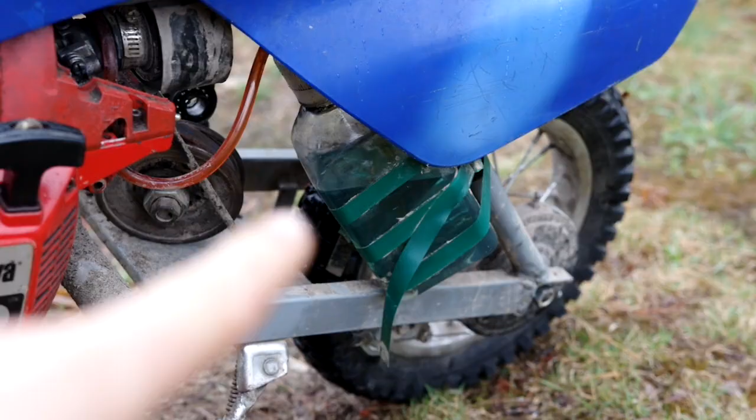This is my Shindao swapped Razor MX350. And although it might look nice, it has a plethora of problems. Like that gas tank, made of a water bottle. Or the fact that it pretty much doesn't have a drivetrain, as you can see. First thing I'm going to work on is the drivetrain, so let's get to work on that.

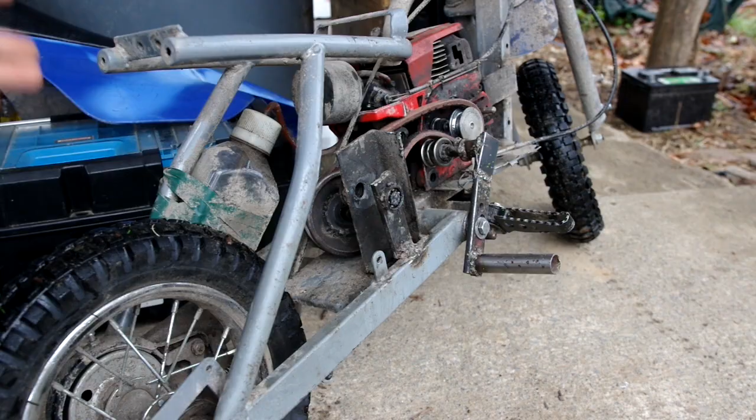Now here is the Razor, and I'm just going to kick this off by saying this was terrible. Look at these welds, look at this. I could probably snap that right now, and it's kind of bending. Well, this is already snapped, you can see. This was okay, but I could also improve this.

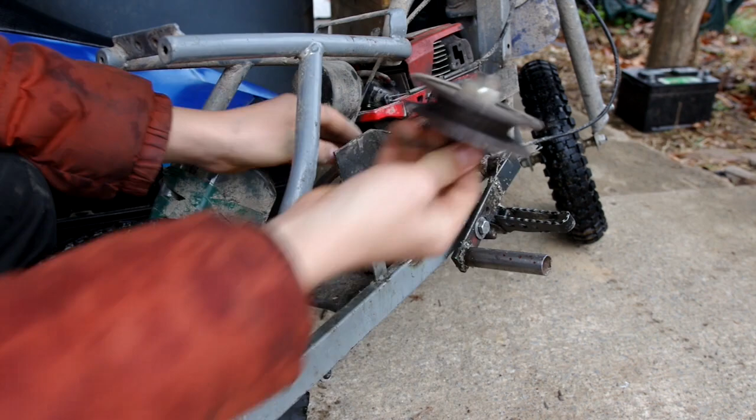And obviously it's not adjustable at all, so you've just got to find the perfect belt and then just pray it'll work. Which has led to some burning belts, as you can see, and generally some bad problems. This is also terrible. I'm gonna have to redo that too, and this pulley is terrible. So let's get started by 3D modeling some new parts here, which I can then cut out of steel.

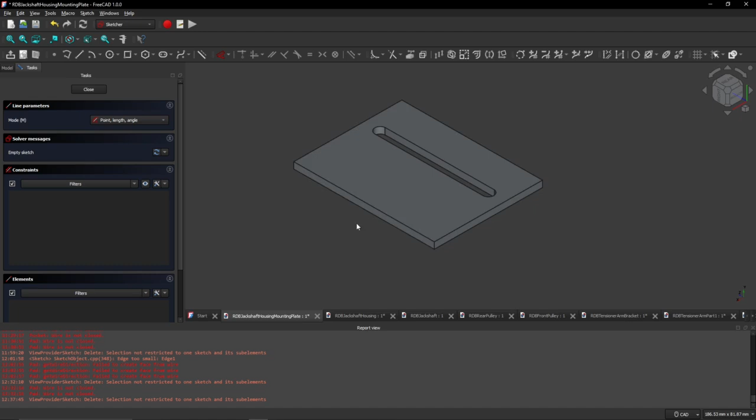And the tensioning arm that actually basically does the clutching also can be adjusted in length by 15 millimeters, and the angle of the end of that arm can also be swung around to adjust it even more. Point is, it's all adjustable. This piece is going to weld onto the frame, and this is just for reference. This is going to be cut out of a piece of plate steel.

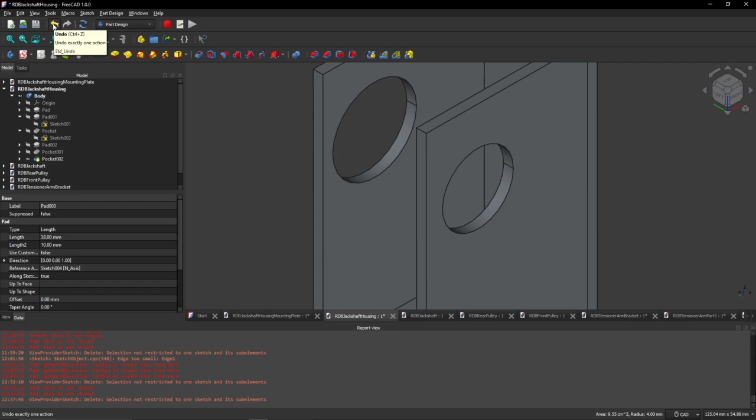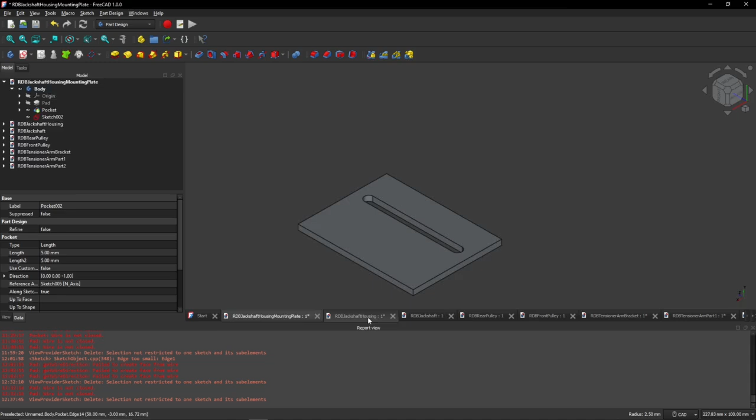These two holes will have bolts going through them, and then those bolts will go into the slot, and that'll allow the jackshaft housing to slide back and forth. The jackshaft itself here will be made out of steel and go into the two bearings between here. Here is the pulley that attaches here. Front pulley. This is mostly for mock-up. I'll just make this with crap I have lying around.

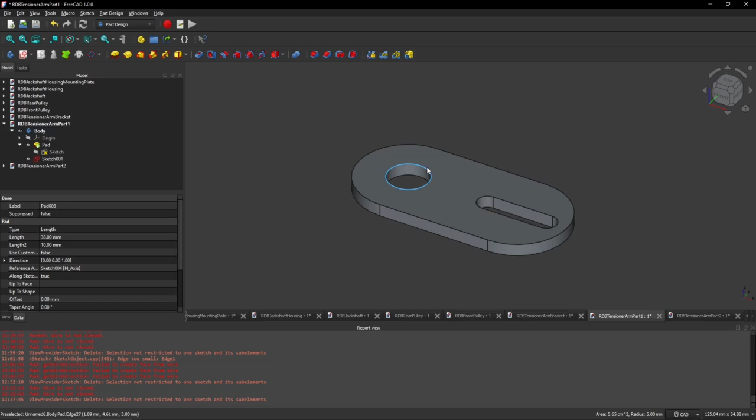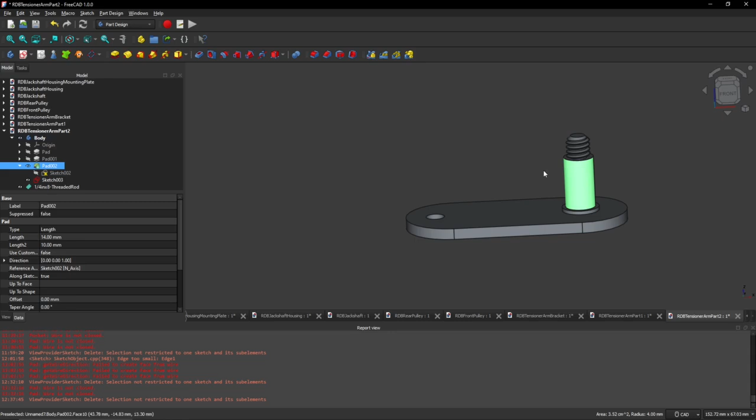This is the tensioning arm bracket, which welds to the frame. Here is the first part of the tensioning arm, and this is the pivot point right here. Two bearings will be welded on each side of this piece, and it'll go into this bracket. This slot here is for another bolt to go in through this hole here on the second part, and that'll allow the length of this to be adjusted a bit, and the angle here, so it'll tilt forward around here. And onto here, two more bearings will attach, which will be the actual tensioner bearings. They'll rub against the belt.

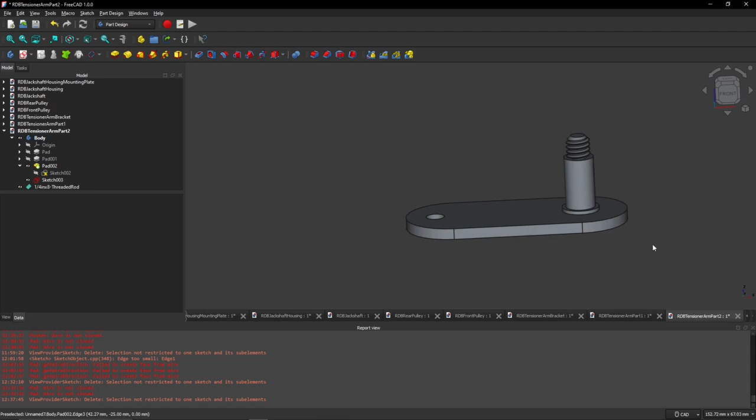Now some parts, like this housing, I can make here with materials I have here, but other parts, like the pulleys and parts of these two tensioning arm pieces, I can't make here. I'll need machines for that. Like this little piece here. I mean, this bracket itself I can make. This I also can't make here, and obviously the jackshaft itself I also can't make here. But I will get to work making some of these parts. Here I am in the basement, and I've gotten this little cheat sheet of everything that I need to make.

What part is this? J1. And here, let me confirm it's the right size. It should be roughly 75 millimeters, so 70, 80, any of those will work. Roughly. Now this gets marked as J1. And off to the pile it goes.

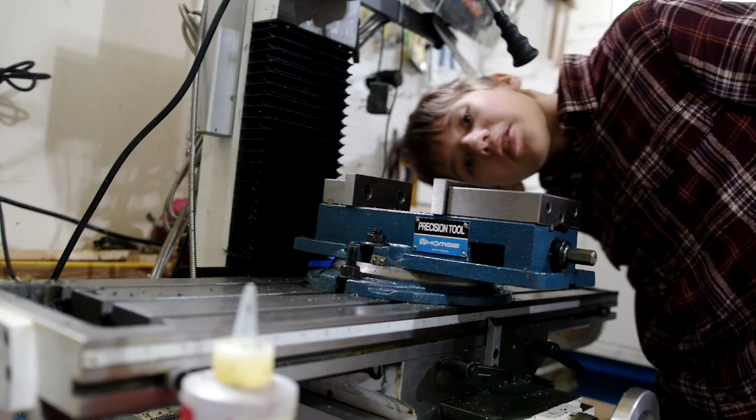There's quite a bit of steel there. So that's every single plate that I had to cut on this paper. Of course, there is still some drilling to do, and I will do that tomorrow. So I'm at the old house now. Hello, this is the mill.

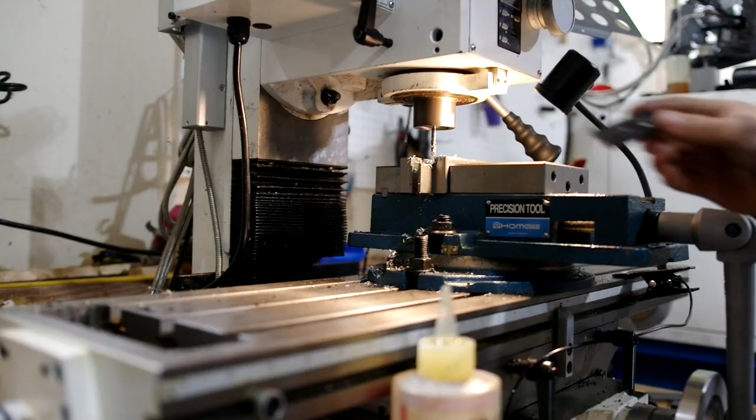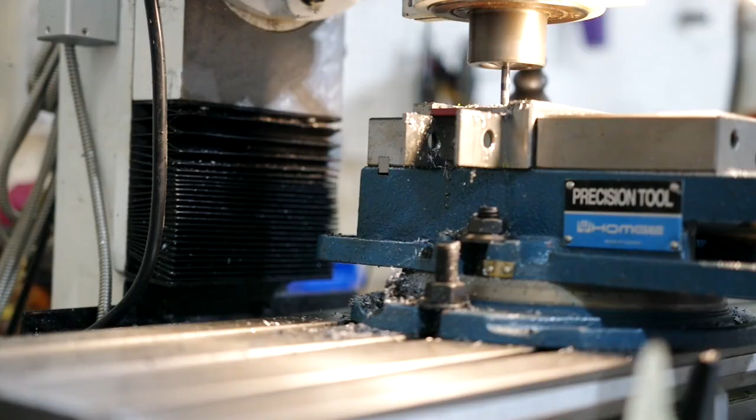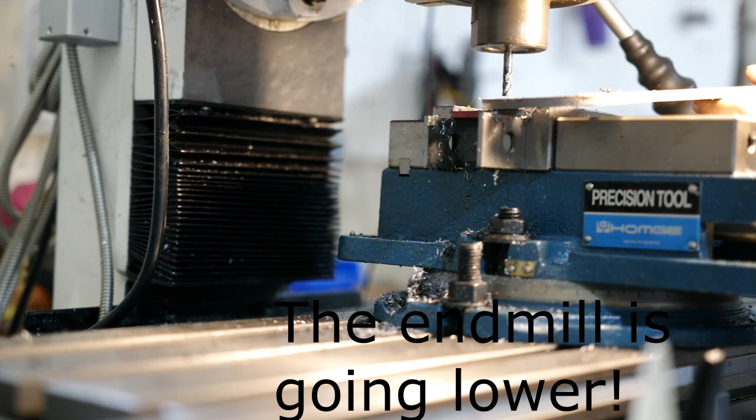There you go, here's the finished part. Now I'm going to make part of the jackshaft housing. Here I've just got to drill 2 holes. Here is the piece finished. And I believe this is the final piece where I'll have to do lots of milling. I'm gonna have to check back on the footage to see how in the hell that happened. There you go, there's the final part.

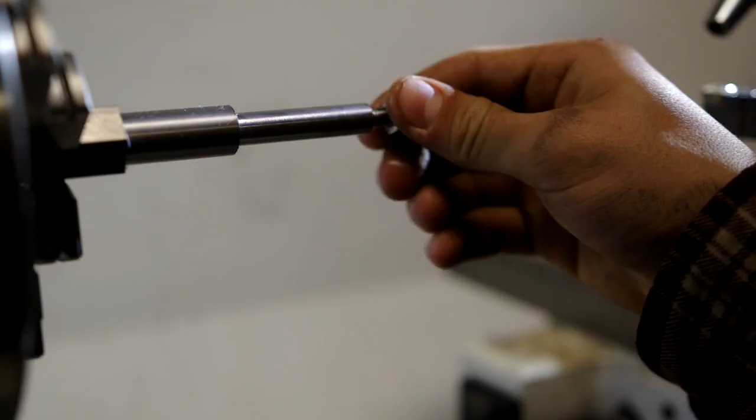Here's the finished cut here, you can see. That's all good. Yeah, perfect.

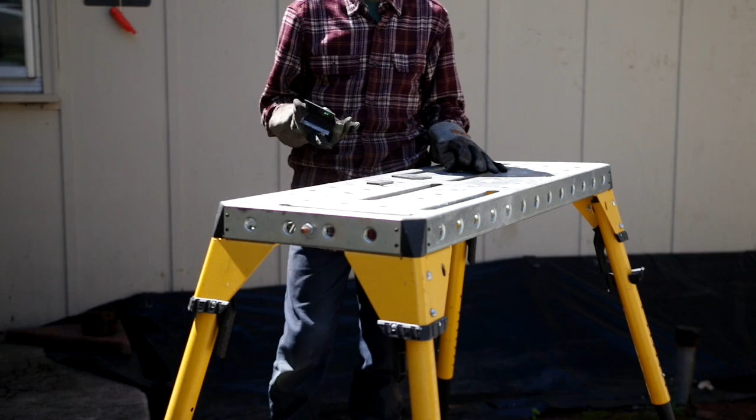I've done some last minute machining that you probably didn't see, like these holes for the bearings. I just didn't have time to film it. But let's get welding, and yes, I am welding on the welding table instead of on the ground.

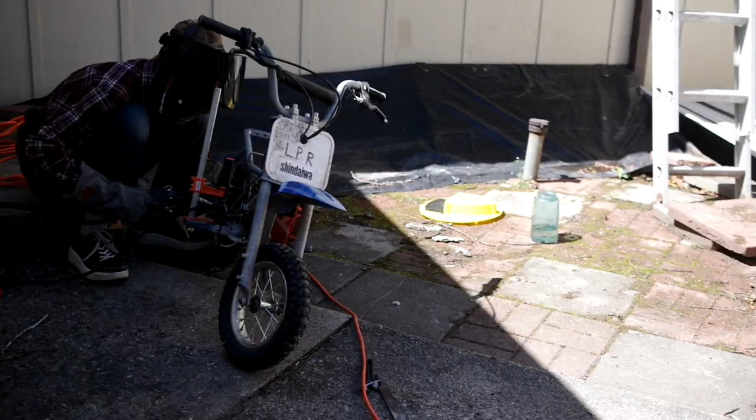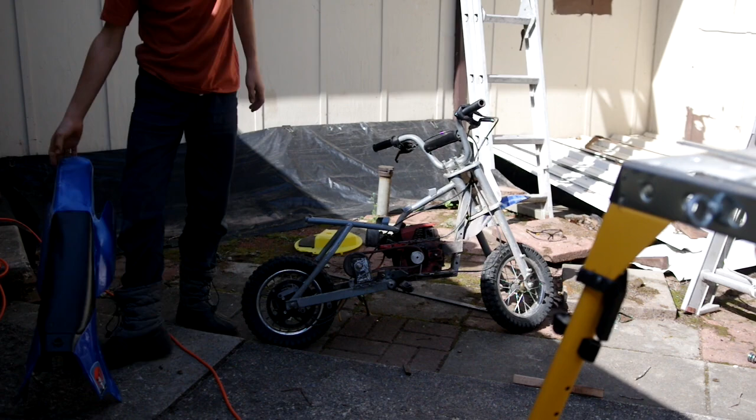The bike, and ignore me wearing boots. This is just what I can throw on really quickly. But anyway, the camera kind of stopped filming a while ago. I was too lazy to change out the SD card.

That's done now, so you can see this tensioning arm piece is assembled and installed, along with the tensioning arm bracket. Belt's in place, and the tensioning arm tensions quite nicely, as you can see.

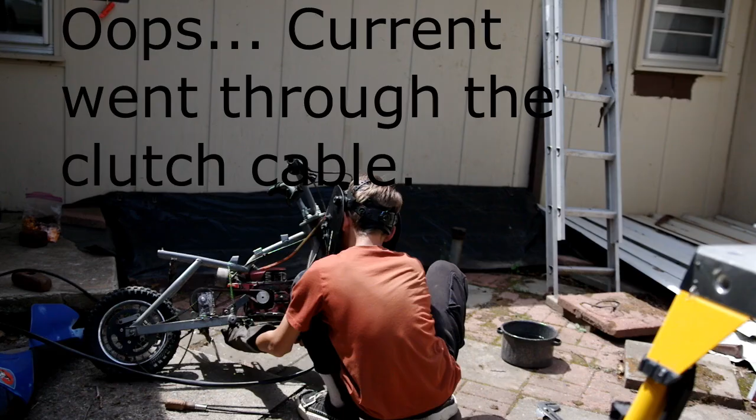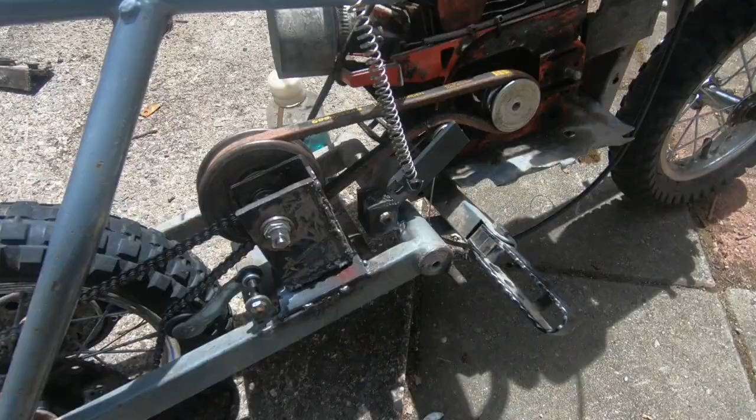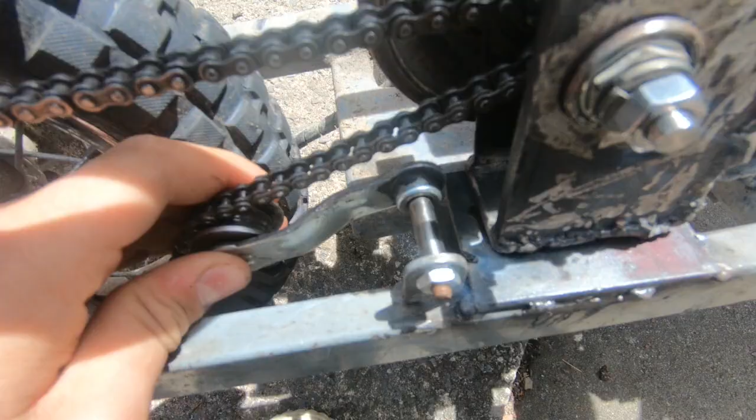Well, I haven't really bothered filming much, but I have tacked together everything. So this is installed, and the clutch lever is connected. And there's this funky tensioner thingy on here. So I'm gonna go ahead and test this. Oops.

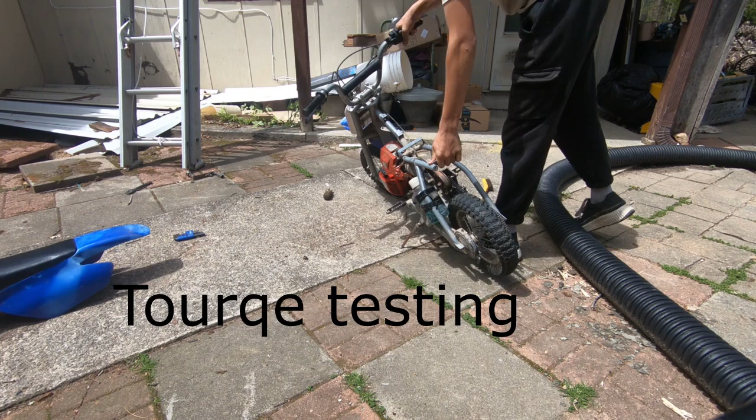GoPro kind of has like 5% battery right now, so it might die, but I'm gonna go on a test drive with a helmet cam and be very gentle because it's all still tacked in place. So here, I'm gonna go for a bit of a longer test drive now that everything's assembled, and I'll let it all warm up, get the belt warm. Hopefully it should start gripping after it's warm.

That was successful, but it was all downhill. Belt's all warm. Let's see how it goes uphill.

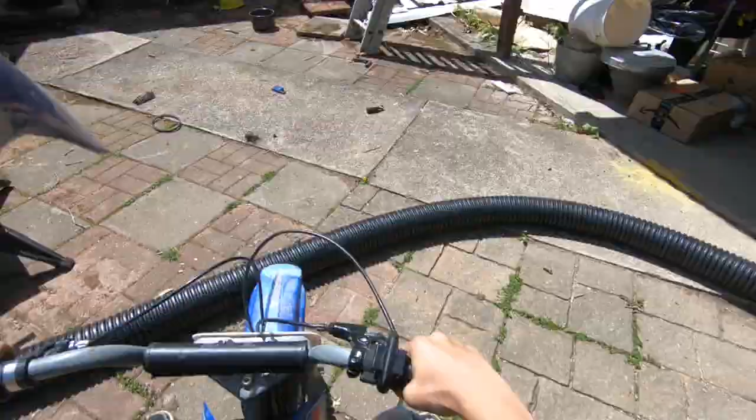That was great. Yeah, the belt slip isn't a problem at all once it's going. Wow. That was fun. It's working great.

Bit of a mechanical failure. The pulley's come off and the chain.